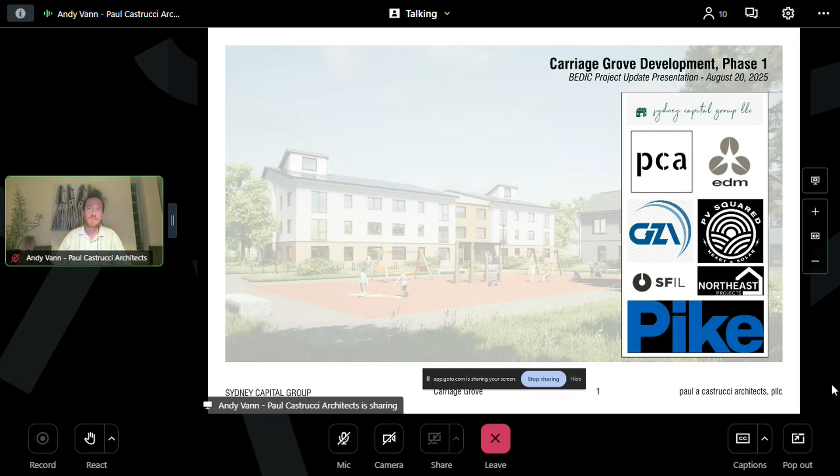So we'll go ahead and get started with our update on where we are with Carriage Grove Phase 1. I have four major points I want to bring up today. First, the status update on the drawing sets and development. Then I'd like to talk about the design team members, which has grown since we last talked as the project has gotten more complex. Then the process we've been engaged in with Mass Save developing our sustainability goals, and finally where we're at with the administration and extension buildings.

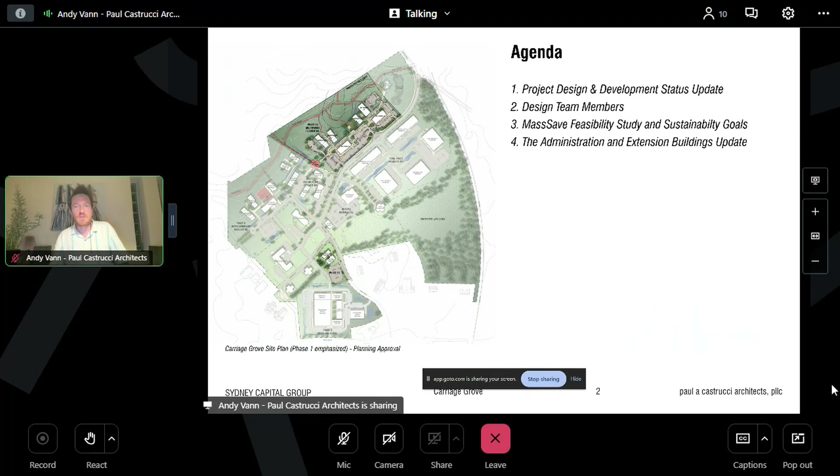So just an overview of our earlier milestones. Planning approval was February 2024. We then completed schematic design midway through last year and carried on with design development, which as of the end of May of this year, we completed 50%. So we're halfway through the design development phase.

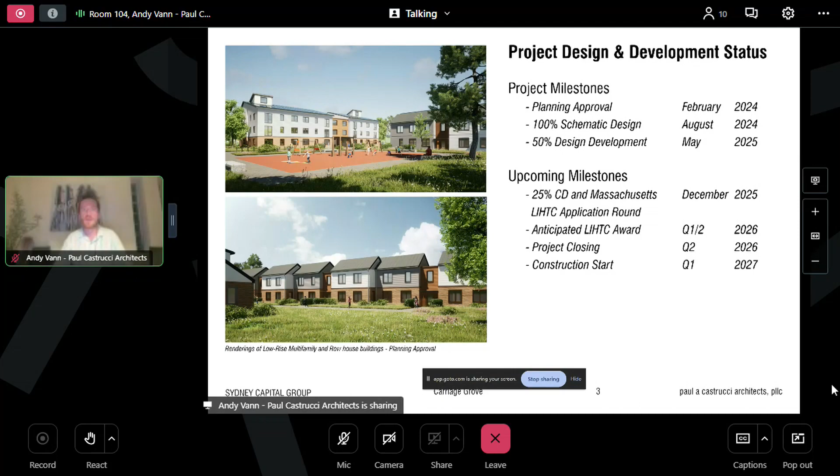In the last few months, we have received a new qualified allocation plan from Massachusetts EOHLC, which included new design guidelines, so we've been updating and revising apartment plans and building plans based on those. We've also received market feedback, which has directed us to switch out some studio apartments for one-bedroom apartments, increasing one-bedrooms and decreasing studios. However, our total number of apartments for the project is still at 105, as included in the planning approval. We've brought on a Massachusetts accessibility consultant to assist us through the Massachusetts Architectural Access Board process, and we've continued advancing the design with our mechanical, electrical, and plumbing engineers, coordinating that development with the architectural layout.

So here you have a couple of snippets from the 50% DD on the left, the row house elevations and plans as we've been developing them.

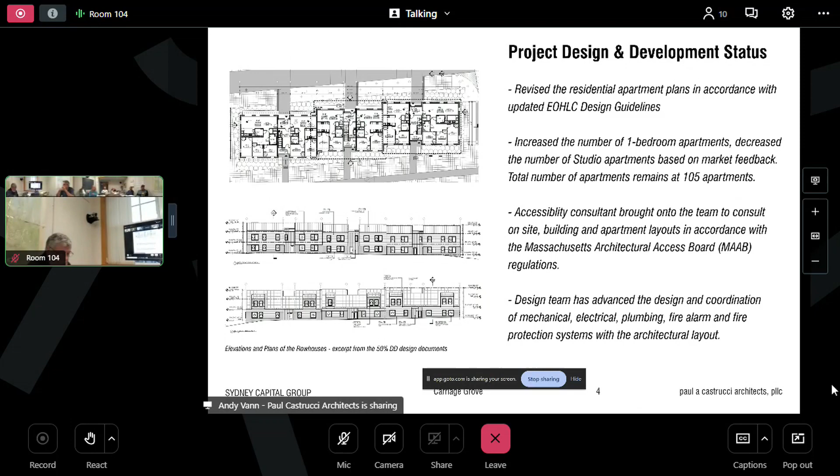As I mentioned before, the number of members on the design team has grown since we last met. At the top, before the break, that's everybody that's been involved for some time. We have ourselves as the architect, EDM as the structural, MEP, sprinkler, and fire alarm engineers, and GZA doing the bulk of the site-related work.

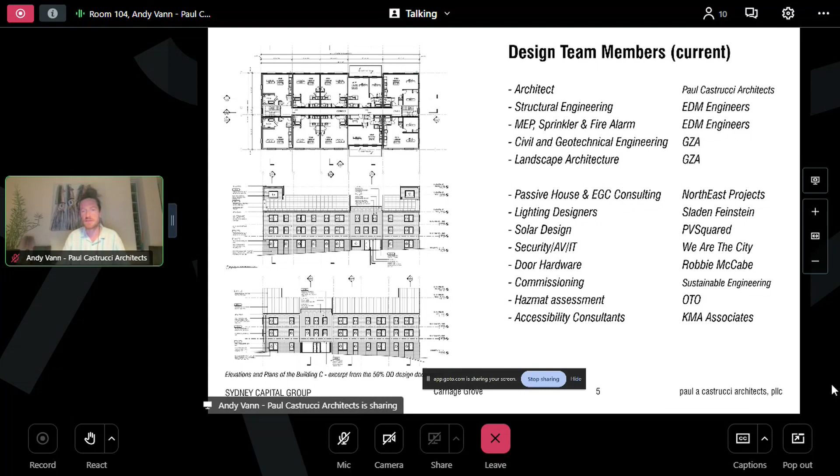Since then, we've brought on Passive House and Enterprise Green Communities consulting firm, lighting designers, solar design, security consultants, door hardware consultants, commissioning, hazmat, and also accessibility consultants. So the team has grown as the complexity of the project has increased, and we've gotten deeper into the details.

As I also mentioned earlier on, we've engaged in a feasibility study, actually 3 feasibility studies with Mass Save to help us determine our sustainability goals. I don't know if you're familiar with Mass Save, but they assist in providing rebates and incentives for businesses and individuals to look into energy efficiency upgrades and design approaches that will decrease the carbon footprint of any development or structure. So we applied for $15,000 in feasibility study funds, which we were awarded.

Northeast Projects performed those feasibility studies on 3 of the typical residential buildings. And out of that study came an analysis that proved that if we were to proceed with a Phius Core Zero model, which is a new passive house model that includes solar panels on roofs to bring us down to zero energy, that actually proceeding with that as a sustainability goal was a feasible approach because it unlocked additional financial incentives for the project.

So after we went through these feasibility studies, we approached PV Squared, who is a solar installer co-op out of Greenfield, Massachusetts, and have brought them on for the solar design portion of the project. So we're trying to set high sustainability goals for this project because we think it could be a benchmark project for affordable housing, for us, for the town, and for the larger Western Massachusetts region.

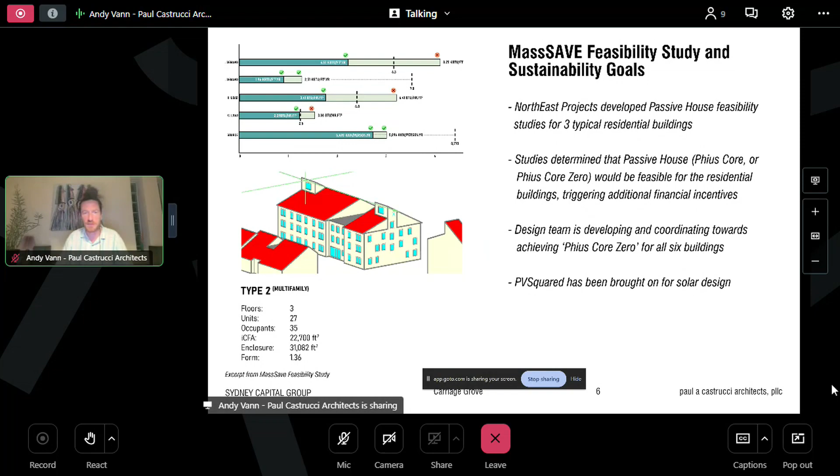And then finally, just to give everybody an update on where we are with the administration and the extension buildings, we have, just as with the residential portion, we've continued to advance the design. We've also received some market feedback on what we initially had as a sort of food hall space. We also have gotten feedback through the National Park Service and the historical consulting.

What we were kind of aggressively pursuing in the extension building was to remove some partitions to open up the space to this food hall idea. That became less and less feasible when you consider that you have to preserve a good deal of the partitions in the space. So the space gets cut up a bit more than we thought, and then the food hall program didn't necessarily seem as feasible.

So with that feedback and with some market feedback based on some studies that we've done, we've revised the concept for the extension building here on the left. Here you can see the ground floor at the top, rather than a series of food stalls, would be a singular test kitchen with a sort of open dining area. And then up above, we would have a co-working space for people to rent out and rent desks at. So a more flexible approach to using the extension building that fits better within the goals of the historical preservation agenda that we also have for the project.

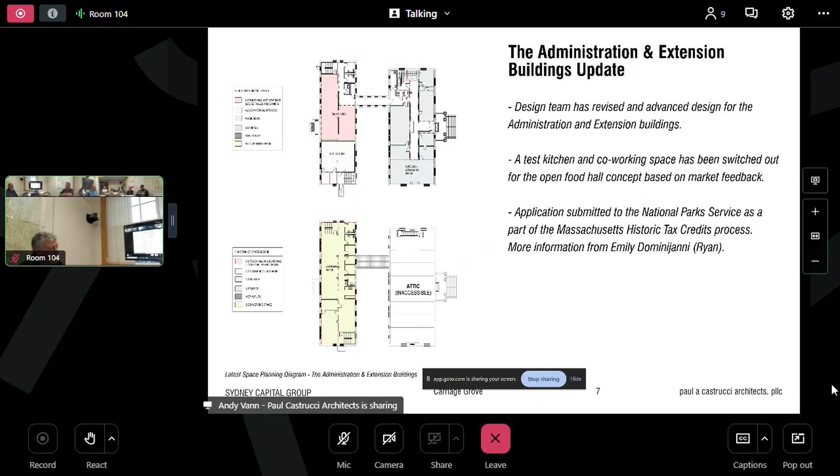And then just to wrap up that portion of the project and sort of wrap up our overall development of where we're at, we have a few ongoing things right now with the admin and the extension building. We're going to perform a 3D scanning of the existing structure. We've brought on existing conditions to do that.

We have also engaged a historical window consultant, Quaker Windows, who's going to come in and look at all the window profiles, perform measurements and create drawings so that when we do the reparation and renovation of the structure, we'll be able to reproduce the window profiles accurately.

And we've also engaged a hazmat specialist, OTO, to come into the building. Kirk, I know you've already opened up the building for them to do some testing and really get into what we're dealing with as far as hazardous materials within the existing structure, beyond the asbestos that we already knew about. So we're beginning to get feedback on that process, and that will give us a better, more accurate understanding when we start to price out the remediation process.

That gives you an update of where we're at with the design. We're moving forward with a larger team, addressing all the issues, moving the project forward as efficiently as we can throughout this process.

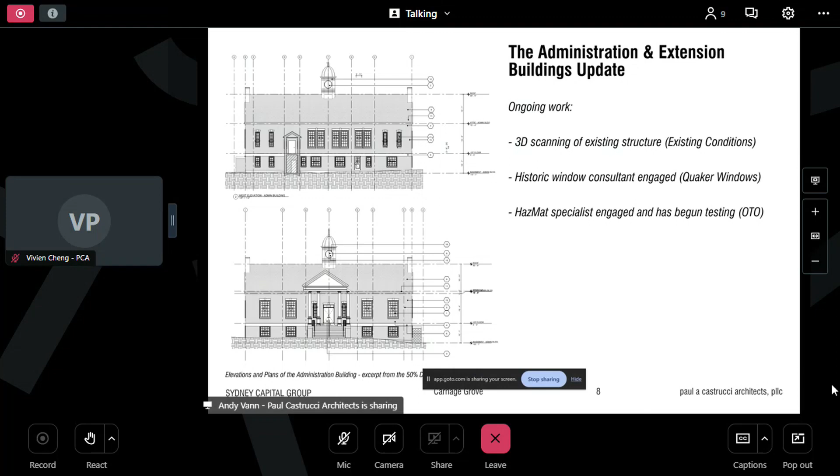Good. Thank you, Vivien. I think the time is rapidly approaching where it may be too late to do that, so that would be a good thing to do. Is there a timing for that structural study that they plan on doing? Is there a time frame? When are you planning on doing the structural study?

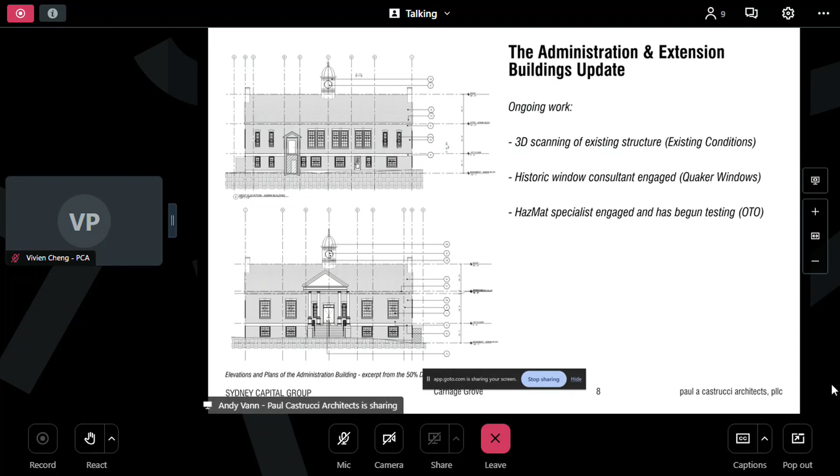Robert's asking. We had spoken to them about this last week, so we have to confirm a date, but it would be relatively soon. I don't have an actual date, but we can come back to you with that once we know. But you're looking to do that as soon as possible, correct? Yeah, we are. We are.

Can I also just add a comment? You as the owner are still liable. Your insurance should have that done. If they can't do it in a timely fashion, Beth, Kurt, I would suggest that you guys look into it. You own the building, it's your liability. You need to kind of get on that sooner. We talked about this almost 2 or 3 months ago.

Yeah. Kurt, did you ever take pictures of it and send them out about that at all? Did I what? Ever take pictures? Not per se. Okay, I would suggest you take some pictures and send them to me. Okay, all right.

Just so, basically, the substructure has settled, most likely from the rain coming off the roof, that type of thing. So that's settled, which then the brick facade has pulled away, and that's why we have boards up there, which then makes it so that those columns aren't doing anything. That's what my concern is, and that's why I dug through the blueprints to look at the structural basis of the portico itself. That was questionable.

Okay, Robert, your concern is noted. Yeah, yes, Dan, and a comment.

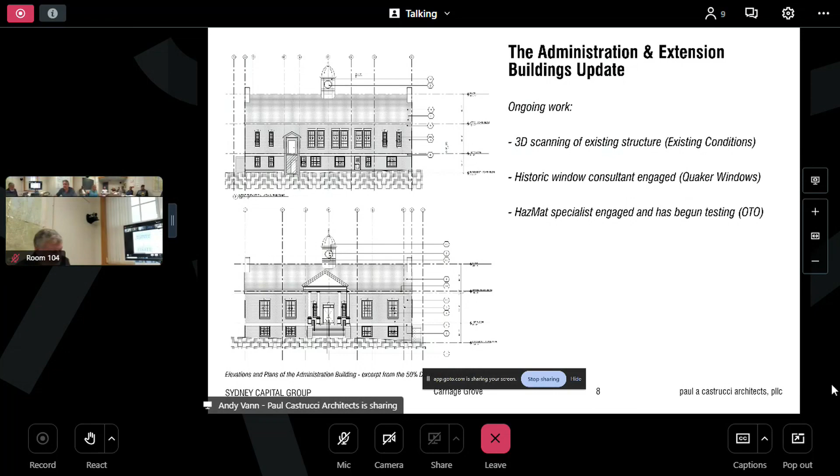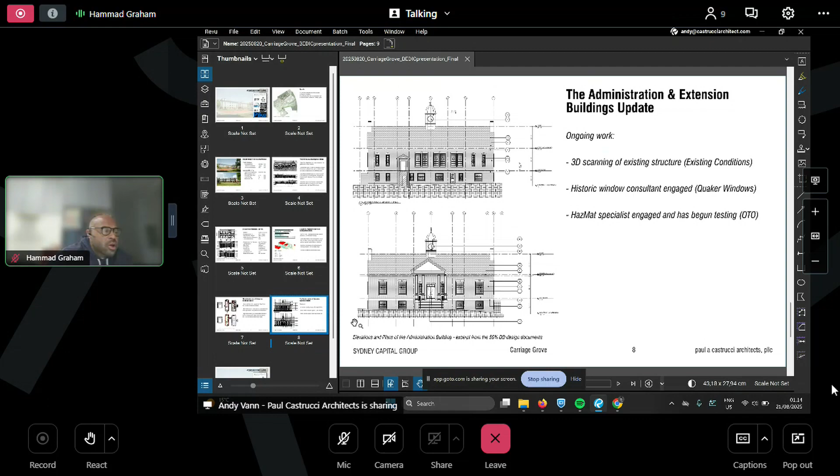So I'll turn it over, since we're on that topic of the admin building and we touched upon the historic process. I'll let Emily chime in as to where we are with National Park Service and the Massachusetts Historical Commission. Hi there, finally got the video situated.

So we originally applied for the National Park Service federal state tax credit application in early July. It went through the Massachusetts Historical Commission, and they provided their comments and forwarded it to the Park Service. Currently we have MHC's comments on the draft, and within the next 2 weeks we should have the Park Service's hopefully conditional approval on our application. The MHC state tax credit round is coming up on September 2nd, so we'll be submitting our first state application on the 2nd, and we got the local support letter from the Belchertown Historical Commission, and we're awaiting the Preservation Mass support letter, but I don't see any issue with getting that. Hopefully come January, we will potentially have our first allocation of state credits.